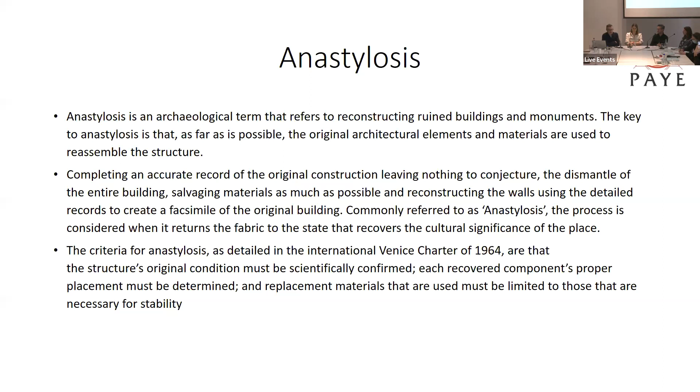And part of this next 15 minutes, we're going to see how that whole process has evolved, from rudimentary drawings in the 1960s through to using modern technology today.

The first great project after the development of the Venice Charter was the repositioning of the monuments that sat within the floodplains of the Aswan High Dam. In the late 1960s, it was decided to dismantle and re-erect a lot of these monuments, putting them onto higher ground.

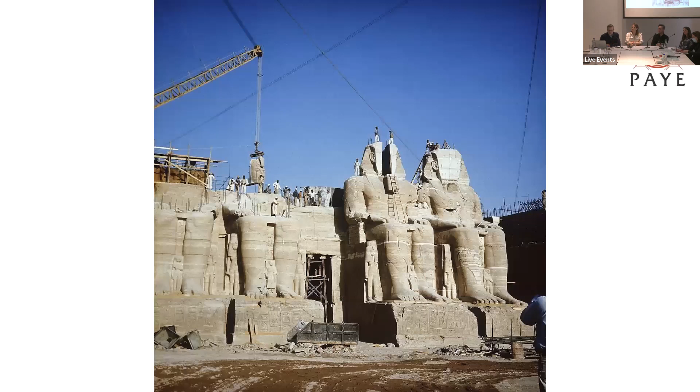And this was the quality of the information that they started with. But when you look at the scale of the buildings they were dealing with, you could see the challenge they were posed with. It was interesting to see Simon actually make reference to this in this morning's lecture, with the Temple of Philae, which was one of the buildings that was moved.

Moving on 30 years, this is the first project I got involved in, about 1997. This is 68 King William Street, on the north side of London Bridge. It's not a listed building, but the client decided to dismantle and rebuild the top 5 floors to help support the repurposing of this building. At the same time, we stretched the height of the area highlighted in yellow by 3 meters to increase the floor height of the upper levels.

It's fair to say that back in the 1990s, the reason for dismantling and rebuilding buildings was really focused on offering it to try and achieve planning, whereas now it's offered to try and provide a sustainable material. There's been a real sea change in the reasons developers offer dismantle and rebuild, and we've certainly seen that increase over the last 5 years.

Going back to this building, when we actually surveyed it, we surveyed it from the scaffold and dismantled it the next day. It was a very frenetic process - draw and go. There was no real time to assess what we were doing or understand the impact of what we discovered. We just had to capture it and take it off the job.

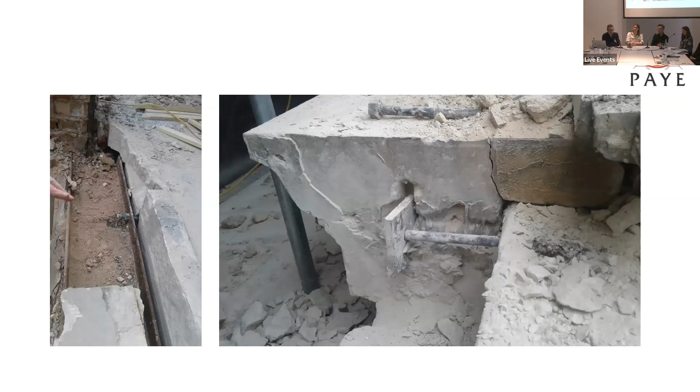But what we had to contend with was the problems of the original construction, which we only discovered as we started to dismantle. We found embedded steelwork which had fractured stones, and on the image on the right you can see the fracture through the top of the cornice block, which questioned how we were going to use that in the rebuild.

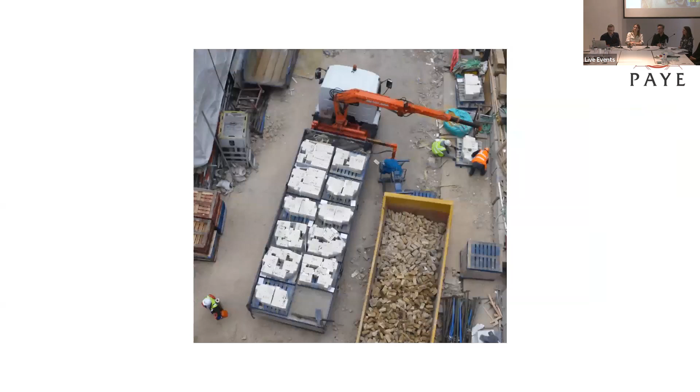All of the stones were catalogued, palletized, and taken down to ground with spider cranes, then placed onto vehicles and taken away. The stock bricks were salvaged and placed in a skip, then taken away separately, palletized and cleaned up off-site where there was more space.

When we dismantle buildings, our normal attrition rate is maybe 2% of the stones we remove. On that project there were about 3,000 stones, and the ones we did break or damage were either damaged originally, or it was something we felt best to damage so we could salvage a stone of more architectural or financial significance. So there were the odd sacrificial stones, but overall we rarely damage any stones on a project.

Then everything goes to our warehouse where it gets stored. Storage is a real challenge on projects - it's a very high cost, depending how long it is between dismantle and rebuild, and this has proven to be quite a problem throughout the project. Some clients get smitten by the idea of someone offering a field to place all their pallets of stone for free, then we have to go along 2 years later and put all those stones onto new pallets because the originals are rotten. Therefore it costs them the same as if they'd stored it properly in the first place.

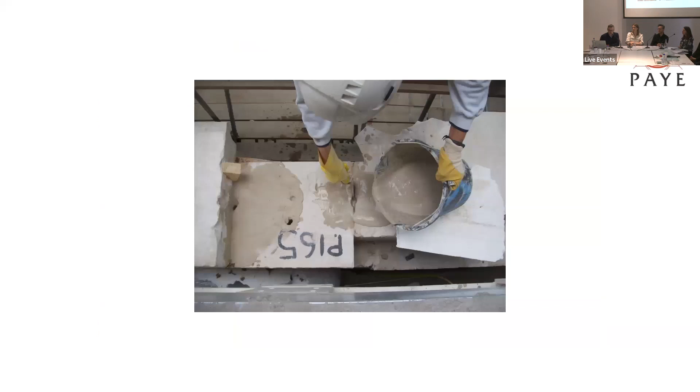With the rebuild, at that time, it was rebuilt as a monolithic masonry construction. That was the approach they had to commit to before the design had really got into earnest, because they didn't have very comprehensive details of the original construction. We could see the scale and depth of the wall and its monolithic nature. All the stones needed to be grouted, and it was a constant installation of heavy masonry, each stone weighing over a quarter of a ton.

This next project, noted this morning, is the Aston Webb screen, built in 1909 as a clever architectural intervention to hide the museum's Victorian boilers. The screen originally featured a solid stone wall facing Exhibition Road with a crested central arch, topped by a graceful colonnade that allowed passers-by a few discreet glimpses of what was behind.

In 2013, as work began on realising Amanda Levete's design for a new courtyard and entrance, we removed the Grade 1 listed Aston Webb screen to protect it and allow the work behind to go ahead. Comprising 1,375 stones, the screen was in safe storage for 3 years. Then at the end of 2016, we started reassembling this historic structure, incorporating changes to make the screen more engaging to the public.

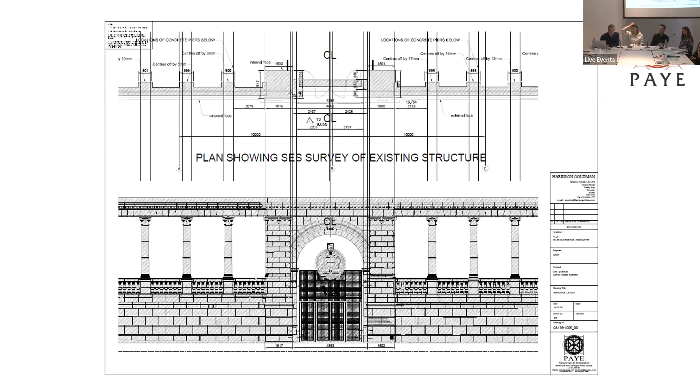So here we have a simple record drawing of the screen before we dismantled it, and then the proposed reconstruction with the post-tension columns, which are double-story columns.

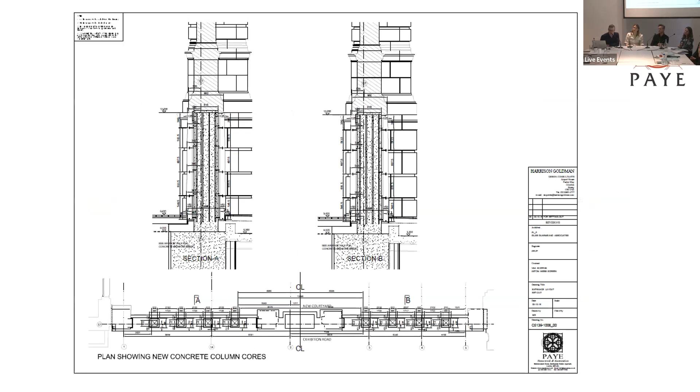Dismantling each of the stones was extremely difficult. This was down to the quality of the grout used in the joggle joints, which comprised very hard flint and a very strong cement mortar mix. The masons used a traditional plug and feather technique, normally used in the quarry to split blocks of stone in half. They drilled holes into the joints, put the plugs and feathers in, and tried to drive the stones apart. The problem was, because the grouts were stronger than the stones, sometimes it caused damage to the stones.

Therefore, we had to think of a different way, and we used a ring saw, which allowed us to get a cut depth of about 200 millimeters. So we cut every joint first down to a depth of 200 millimeters, and once we'd completed that, we then used the plug and feathers.

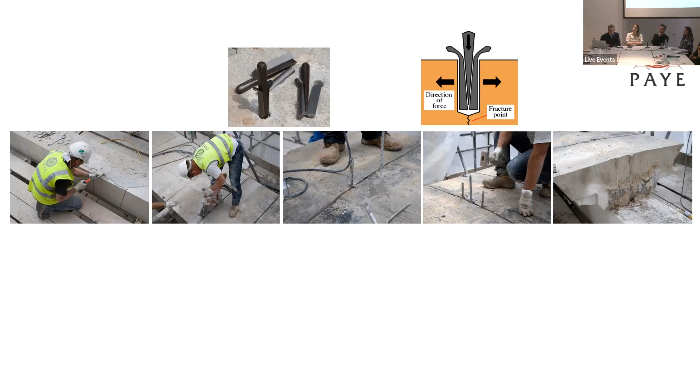Once we'd split the stones apart, we used another traditional method of masonry called a Lewis pin, which is designed to open once you apply load to it. So we drilled the hole, installed the pin, then lifted the stone enough so we could put a conventional strap underneath, allowing us to lift it more safely after that.

The stones were weighing over 1.5 tons on the grand cornice, and these were being moved around by skilled masons, but also with specialist lifting equipment.

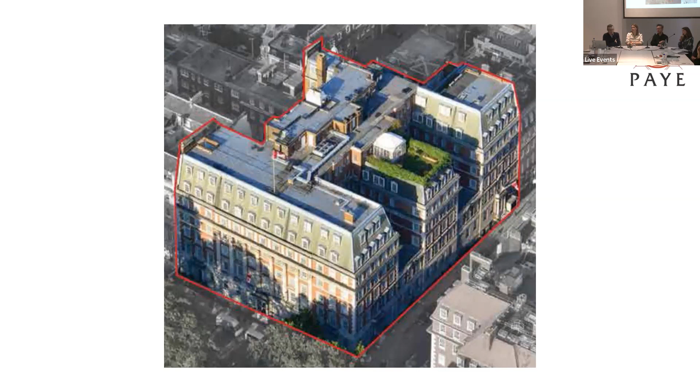1-3 Grosvenor Square was the former Canadian Embassy in central London, and it was sold off as a private development. We were tasked with dismantling the building, placing it into storage, and then reconstructing the facade as a new face to the new structure behind.

The client had two main requirements for us. One was to increase the height of the building by 2 meters, and the second was to provide no visible movement joints. So we had to consider how we were going to achieve this task.

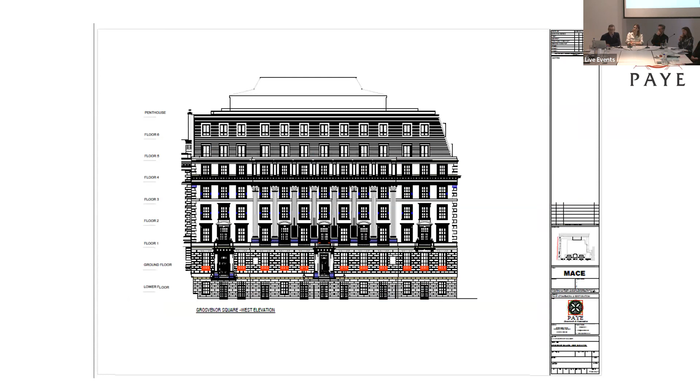Stretching the height was relatively easy because we found there were certain architectural details where we could add additional courses to push the height of the building. The blue area is actually a new elevation that we installed.

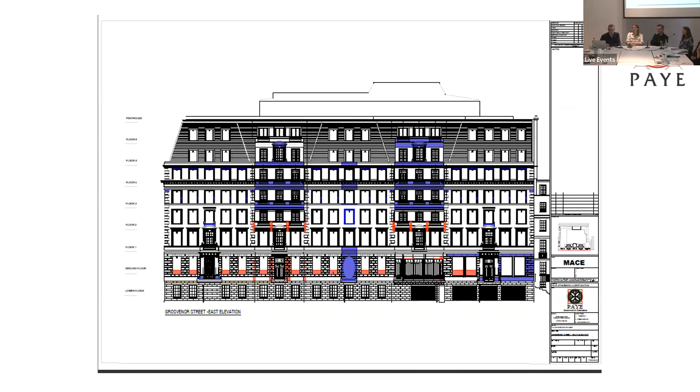With the movement joints, we looked at the use of hydraulic lime mortars and how we could use those to extend the distance between movement joints beyond the perceived code. We provided them with a facade which has discrete joints, hidden behind the way we connected two elements of the facade together.

Again, we had the usual task of trying to survey the building, catalogue it, and dismantle it in a very short time. Every stone is provided with a unique reference number. Here we have window head S107, which we thought was just one stone, but when we got up there, we found it was two stones. These are the things we constantly had to deal with on a day-by-day basis.

Again, every stone is catalogued and placed on a pallet, and that pallet was placed on a hard standing in East London.

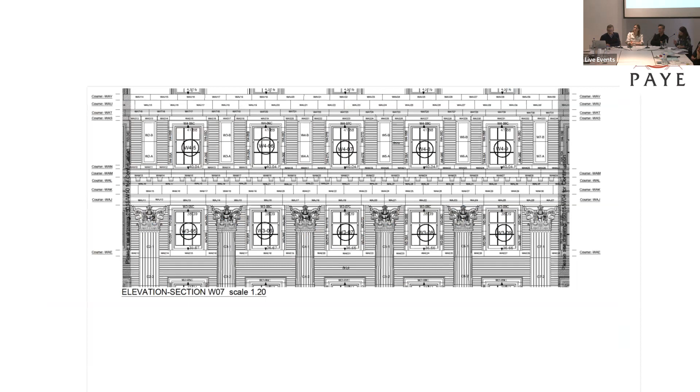Record drawings were created, and as part of this process, before we started, we also used GPR, ground penetrating radar, which allowed us to assess the depth of each stone. We've got a way of recognizing the difference in the flutter of the GPR scanner, so we know where the density changes from a solid material like stone to a less dense material like brickwork behind.

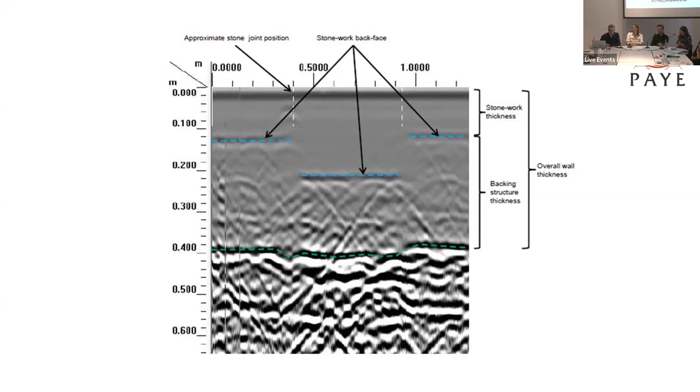We then looked at some of the lovely old 1920s construction books we have in our library, and found details similar to what we thought was being used at the time.

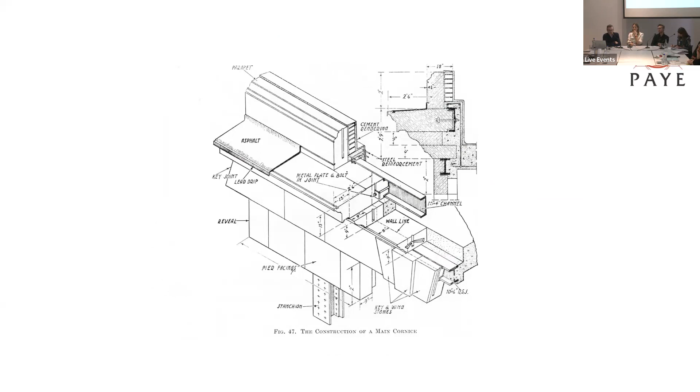Just quickly on the bricks, one of the problems we find on this project and most projects is it's very hard to demonstrate the suitability of a brick in a new use. We can't test it because things like frost-resistant testing, we'd have to test virtually all the bricks to satisfy that they're actually fit for purpose. So we had to go through a process of selecting particular bricks based on certain criteria.

We found enough bricks from the dismantling process to reface the Grosvenor Square elevation, and then we found a new brick that was a very close match that allowed us to clad the rest of the building. With the facade itself, it was a complex challenge because we had a facade of brickwork and stonework, which we weren't allowed to have any movement joints in.

And then we had a concrete frame behind with post-tension slabs. So the concrete frame through elastic creep is going to shrink by about 1 millimeter per meter over 50 years, and you've got the deflection of the post-tension floor slabs. Then attaching to that, you're applying a monolithic facade.

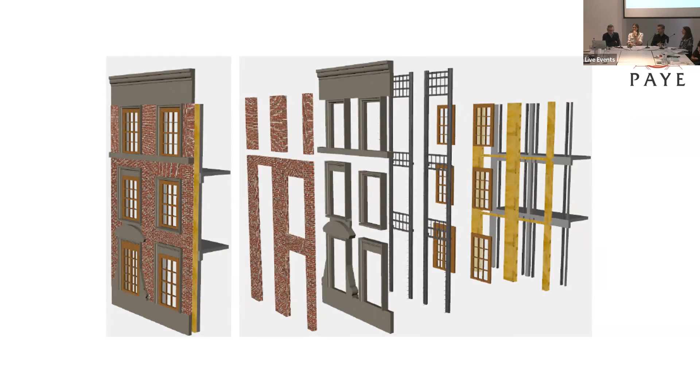So we installed a stainless steel frame within the cavity wall construction that was able to articulate the different movement criteria of the two structures.

Here we see the red box with the black core. That is a stainless steel box section that was attached to the concrete frame with sliding joints, as you can see in the top right of the image. So that provided us with the ability to control the movement of both of the structures.

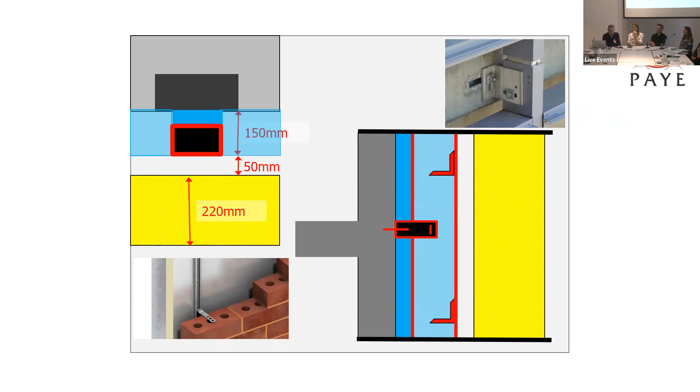Now this moves us on to 2022, which is where we are now. This is a building that we've been looking at for the last 4 months. It's in central London, a 7-story building, built about 1915, and it's got a few inherent defects that need to be addressed.

So we've been tasked with the challenge of dismantling the facades, reducing the thickness of the facades, and then rebuilding the building attached to a new concrete frame that will be constructed behind. This is where we've started to see a real benefit in the use of modern technology.

The first thing we've done is completed a point cloud survey of the building. A point cloud, I suppose, has come out of the whole BIM process. This has evolved as a 3D virtual model development to facilitate successful on-site execution of new build projects, and BIM has really been at the forefront of that.

The challenge we have is that we're working on a building where we really need to know how the building was built before we start the project. And 3D laser scanning has helped us to do that.

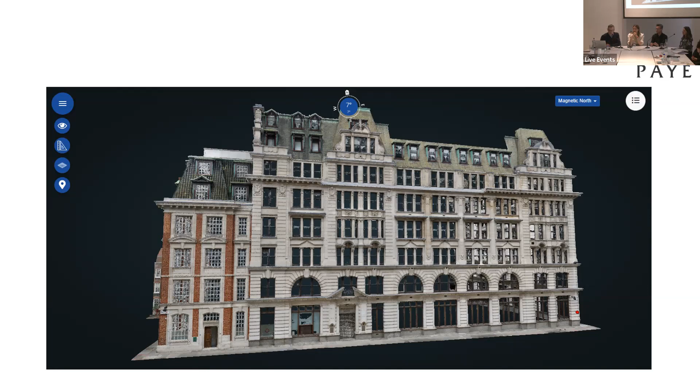With the security requirements for the building, internal access was not possible. So all of our survey works were completed externally using drones over a 2-month period.

At the moment, we have completed the models of the external facade. The model itself, and as we can see here, this is a close-up of the point cloud survey, and we can just see the little dots that form the register points for the facade.

With regards to tolerance, the point cloud survey is normally about plus or minus 2 millimeters. When we're trying to work out which dots are actually the edge of the stone and which are just part of the face of the stone, we've got a tolerance about plus or minus 4 millimeters. So overall, we're creating a solid, strong record of the facade to within 6 millimeters of its correct size.

And if you go back to what we were looking at 25 years ago, when we were just sort of drawing it as we got to it, it's been a real sea change for us in how we approach the dismantling of buildings.

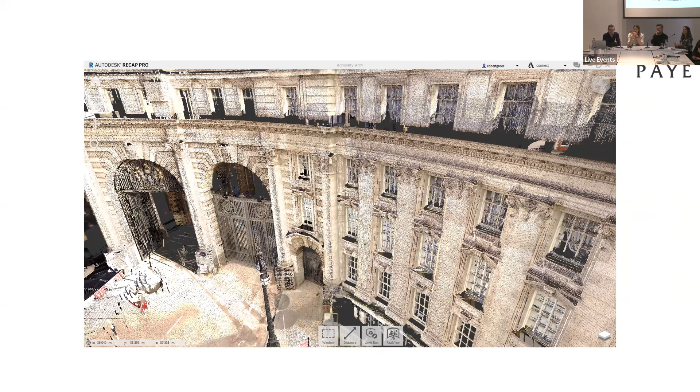This is a scan from a couple of years ago before drones were available to us. You can see there are a few black shadows above the sills and above the cornices in the projecting areas, because the conventional laser scanner sat on a tripod at pavement level is unable to see those areas.

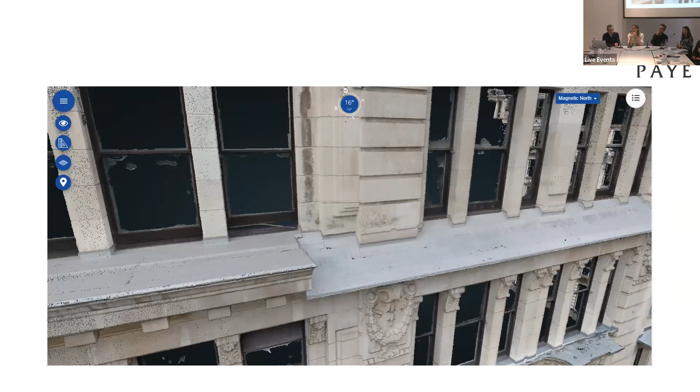With the advent of drone 4K imagery, we're able to get a fantastic record of the building. What we've been able to do is combine that with a laser scanner attached to the drone, so we're now getting a full 3D model of the building before we start.

The drone survey provides us with a visual record in a series of vertical drops that allows us to assess the condition of the masonry. This also goes to the architect to advise them of what parts of the design actually worked and didn't work with the original construction, so we can help influence how they look at the remodeling and what they may need to change.

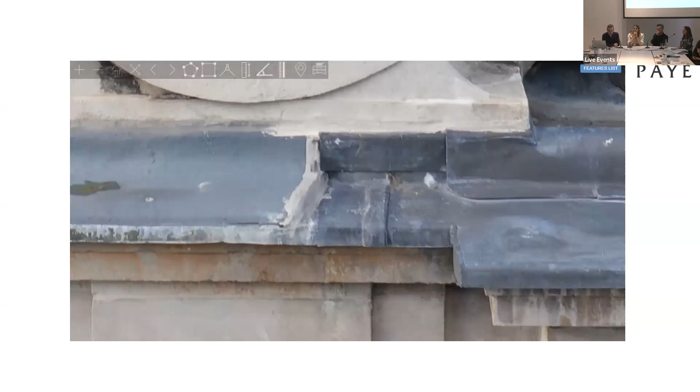A classic problem with buildings of this nature is how they address waterproofing to the sky surface of the projecting details, so we're looking at ways of reversing the fall to these cornices. Here we can see a rather crude repair to an original detail, which is very poor.

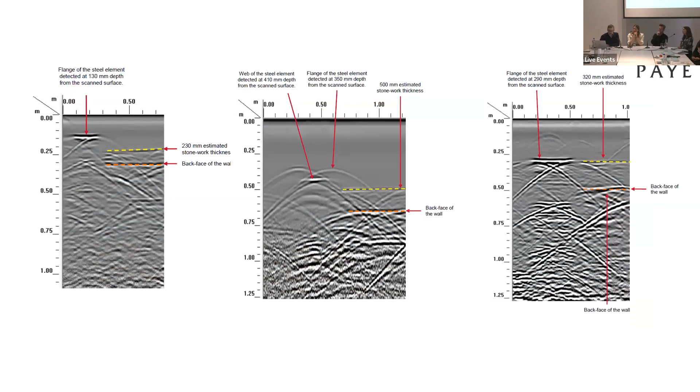As with the previous project, we completed a GPR scanning survey of the facade, so we understand what the depth is of every single stone on the building, and we've mapped that onto the elevation drawing. So we know exactly where the face is, where the back face is, and we can start to look at how we reduce the thickness of the wall to create the optimum thickness of masonry to allow them to put an inner wall line in, which is on one consistent line.

We can start to build up a more detailed understanding of what they can do for the repurposing of the stonework. And this is at stage 2 or stage 3 in the project, and not at stage 5, where we used to be starting to have these discovery discussions.

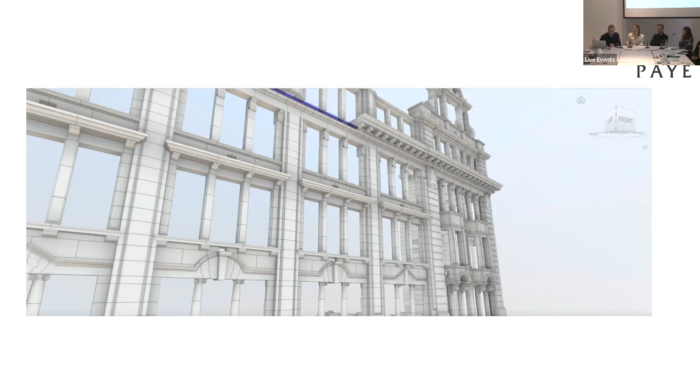With our models, this is an exploded version of the previous screen. Every one of our stones is drawn individually - there are 5,500 individual stones drawn on this building. So we can understand what the impact will be of any movement, of any change in any part of the structure or detail that the client requires.

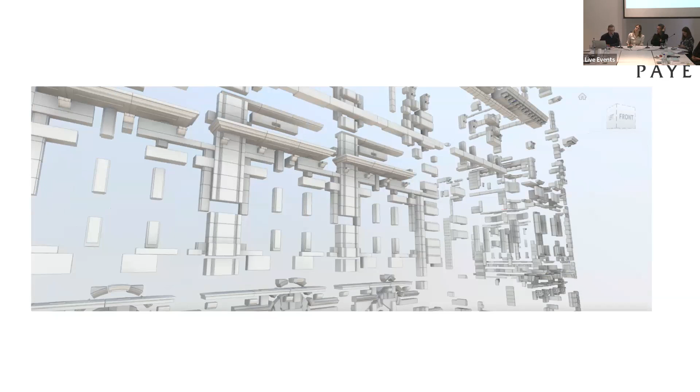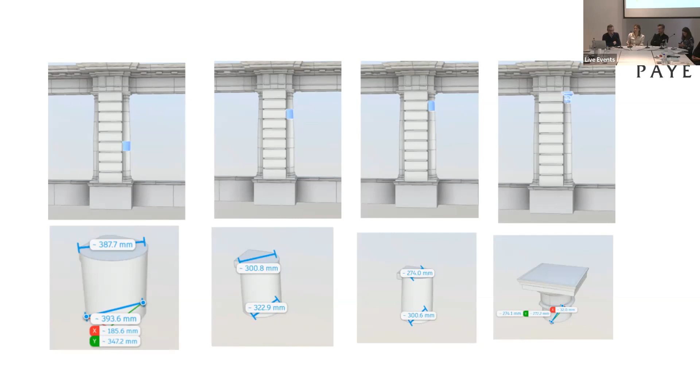Here's a couple of screen grabs of the ground floor. What we were trying to understand was what would happen if we tried to stretch the ground floor by a course, and how that would impact upon the entasis of the circular columns which are against the windows. It was proven that there was not an opportunity to do anything with this because it would have been such an adverse effect on the masonry, so they moved on to look at another solution to the challenge they had.

Whilst this exploded view shows the kit of parts that we're going to be carefully dismantling, we could have just drawn this as a flat plane, just as a simple flat element of stonework, but we recognized the benefit of modeling and capturing every single piece of stone as its own individual model.

And we've started to look at the next phase of the process, which is the dismantling, and how we can improve the process of dismantling. What we found is that the usual error is the human error of recording the information of each stone as we remove it off the project.

On that website, we're able to catalog the original size of the stone, the palette reference for the stone, and what we need to do to that stone to allow us to incorporate it into the new works. It also lets us understand our productivity in real time, because as soon as you scan it, it goes straight to the cloud, so we know exactly what day it was removed, who removed it, and who installed it on site, giving us a full understanding of the quality process.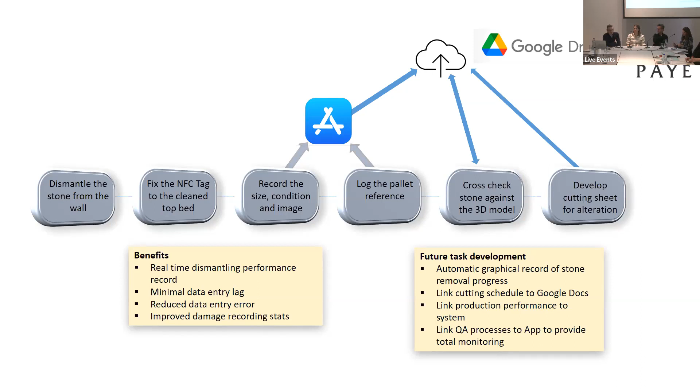Now I would like to invite Lionel to join us remotely, if he's in the room. All right, can you see my screen? Absolutely, okay perfect, all right.

I will first start with introducing Rotor very quickly for those not yet familiar with the organization. As Odeline mentioned, Rotor was started in 2005, and initially we were looking a lot at the leftovers of industrial production in general, looking at amazing or strange objects like this one, which is a color transition from a bin liner producer. It was a question of trying to find new potential uses for these materials, but also to look at the kind of culture embedded in these products.

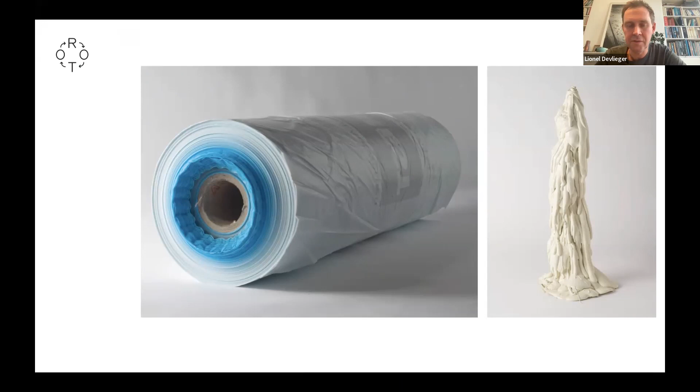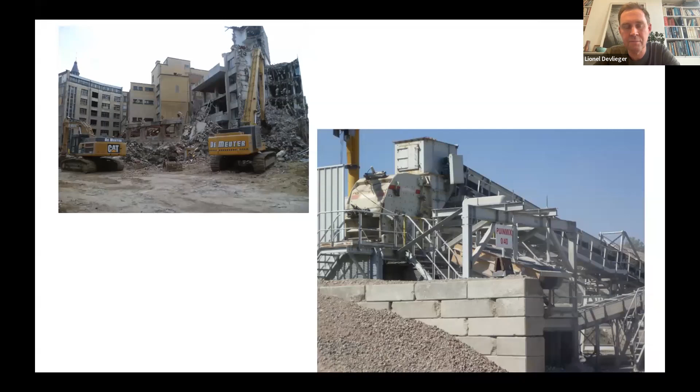But then very quickly our attention shifted within the large field of industry. We started to focus on the construction industry because we realized that the amount of resource waste there was so staggering that it seemed it would be quite simple to make a little bit of a difference. We were shocked by how widespread the practice of downcycling buildings was, crushing the inert fraction into aggregate. We were also shocked that some public authorities, like the Belgian or Flemish government, were even proud of that practice, which for us boils down to the systematic destruction of value, reducing it to something utterly meaningless and deprived of any use value.

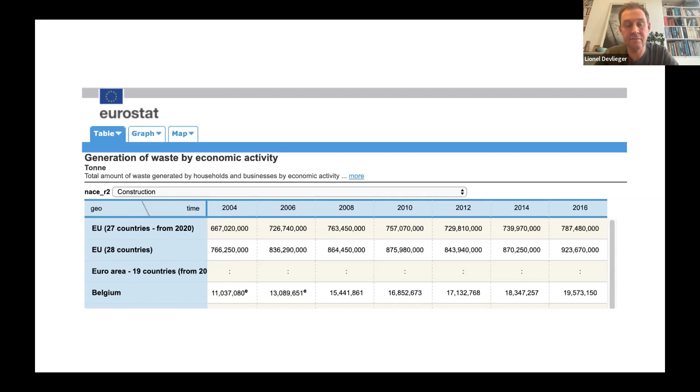Now, studying the whole sector of building and demolition waste production, we gradually looked at the numbers and were pretty amazed that the situation was not improving. On the contrary, what you're looking at here are the numbers for Belgium specifically, within the EU at large. Between 2004 and 2016, you have an increase in the amount of building and demolition waste produced that almost boils down to a doubling, going from 11 million tons to almost 20 million tons in that short time span.

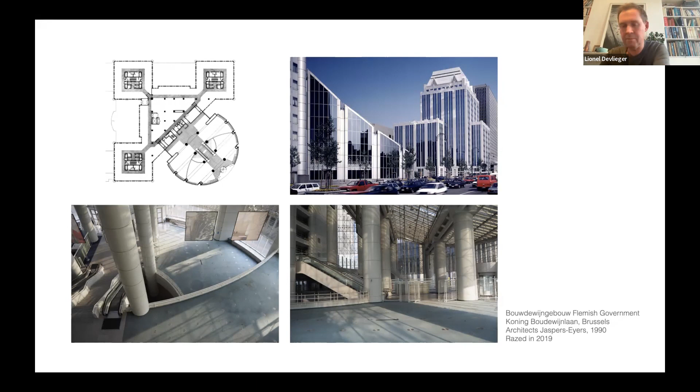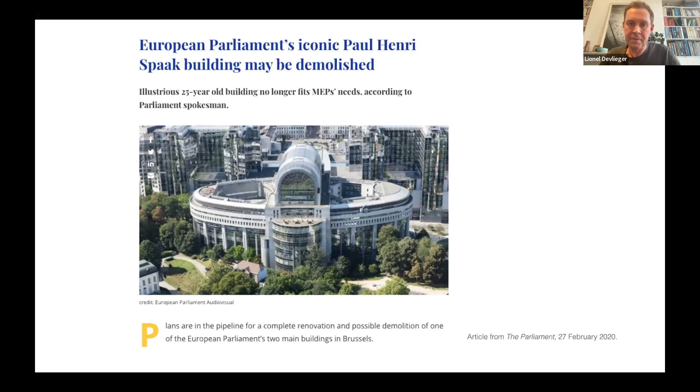It's a question we've always asked: why is this happening, why do we have that increase? There are probably many elements to an answer, but one particular culprit we'd point to is architectural obsolescence. We have buildings of large, even mega size, being demolished after increasingly short lifespans, such as this building, barely 30 years old when it was razed in 2019, a building from the Flemish government, or this one, the European Parliament building in Brussels, whose fate hasn't been decided yet, but which is also a little more than 25 years old and might be razed completely as well. It's another topic, but it shows we're dealing with important cultural question marks.

Now Rotor today, this is the way we present ourselves, is like a table with four legs. Part of the organization deals with interior design projects, and there's a lot of work around design assistance, I'll come back to it. There's a cultural dissemination part of the work of Rotor, producing exhibitions, conferences, and teaching. There's research, and then there's a fifth leg added already 5 to 6 years ago, which is Rotor DC, now a spin-off company active in the dismantling, refurbishing, and resale of building elements.

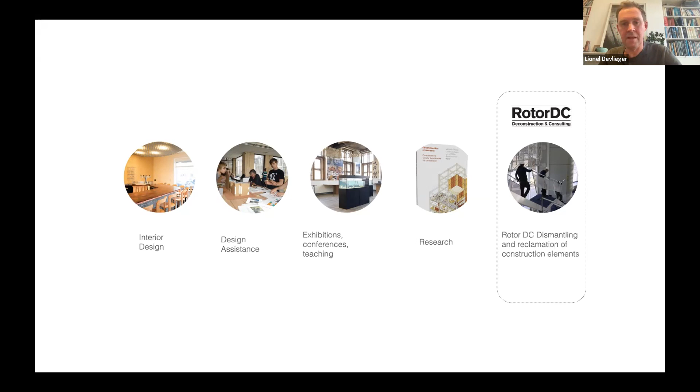Today, formally, you have on the one side Rotor, which is a non-profit organization still, ever since it was founded. And then you have Rotor DC, the spin-off, which is a more commercial company, but it is organized as a cooperative company.

Now, what has Rotor been doing? I already gave you that overview, so I won't go over it all. That's not the purpose of this talk, but an important portion of what we do is providing advice to public authorities on how to tackle the whole issue of building and demolition waste, and to push these authorities in the direction of more virtuous practices. In many cases, this means pointing back at what was being done in the past, which was always better than what is being done today, such as the practice of selling buildings that need to be demolished instead of just asking a contractor to break it down.

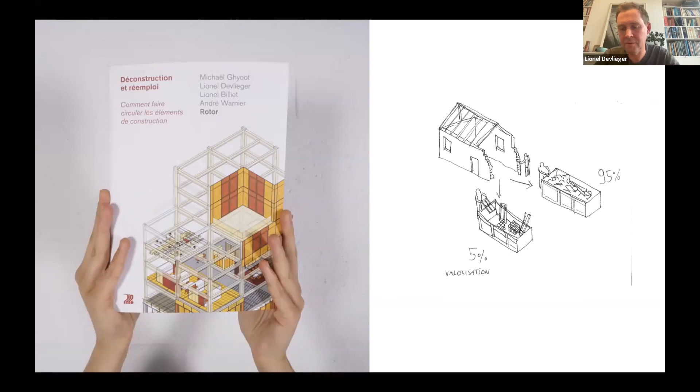We also give advice on what could be done in terms of contemporary policy through books such as this one you might be familiar with. The sketches show one of the ideas that is very simple, which would be to force anyone who's taking down a building to put 5% of the value of the volume of what is being dismantled aside for refurbishment and resale.

Now, we've also done a huge work of documenting in Belgium those companies that are already active in the refurbishment of second-hand building materials. That is the project Opalis. I will come back on it later. It's a project that started around Brussels, grew over the territory of Belgium, and now is expanding towards France, the Netherlands, and we're also looking at the UK in collaboration with our partner Salvo in the UK. Obviously, we hope to expand this project even further in Europe, but it's going to take some time.

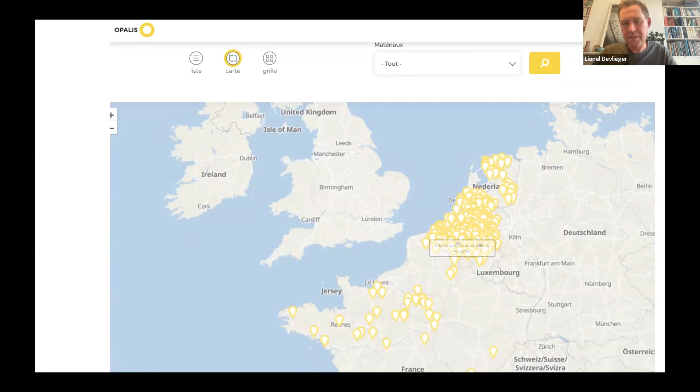The major recent expansion happened in the context of this project, which is a European Interreg project, FCRBE. If you type that in, you will find the website of the project with lots of documentation materials and also policy advice materials. So the project has entered the second phase now, but an awful amount of very useful deliverables have come to surface. So I definitely recommend you to go and see there.

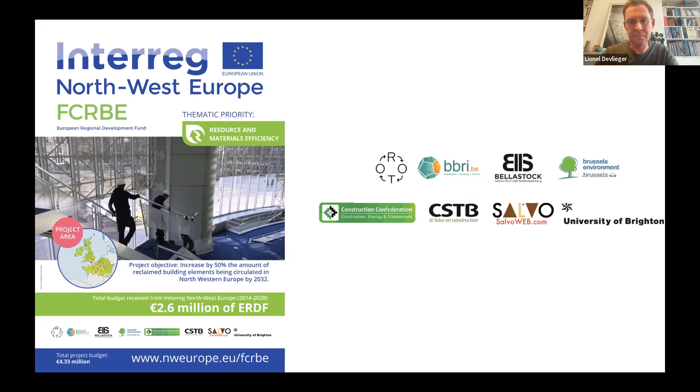On the right-hand side, you will see all the partners involved in this project. Obviously, the purpose of projects like that is to look at that gigantic network of operators which are engaged in the tantalizingly complex work of refurbishing existing building materials. It's in the continuity of the notion of urban mining, of course, even if we tend to be a bit skeptical sometimes about that notion. But in any case, most often we enthusiastically embrace it as well when it's useful.

Now, to get back to the practice on the field, this is a project that I wanted to show you because it has been like the project that kickstarted Rotor DC into existence. It was a project that started in 2014. The building you're looking at is no longer there today. This was the seat of the most important Belgian bank, which has been taken over by the French, is now the BNP Paribas Fortis Bank.

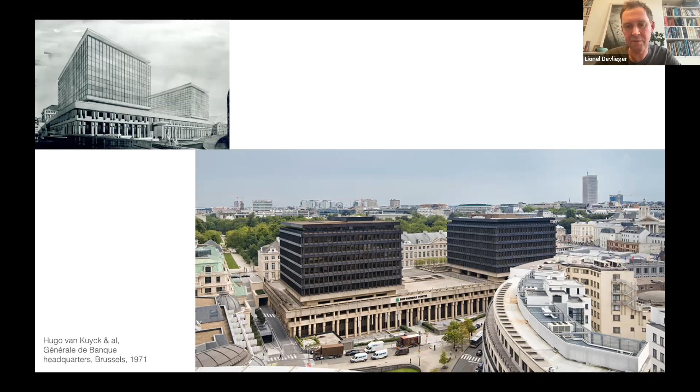This building from the late 60s, built early 70s, is a brutalist design. It wasn't really loved so much, but everybody was agreeing on the fact that the interiors of the bank building were amazingly well designed and also realized in very precious materials. I don't know if you can see it, but have a look at the octagon flooring in this building, which is made out of the same granite that is also used for the walls here.

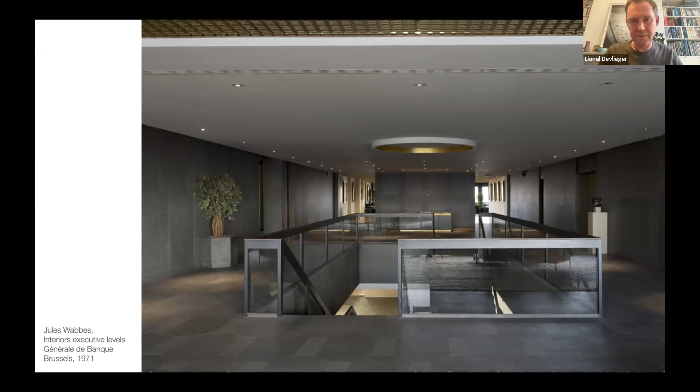You will see it later on in this presentation. So we went to that building on invitation of Docomomo Belgium, and we were invited to extract as much as possible. The first motivation was a heritage motivation because of the value of these interiors, but obviously for us the environmental dimension also played a role.

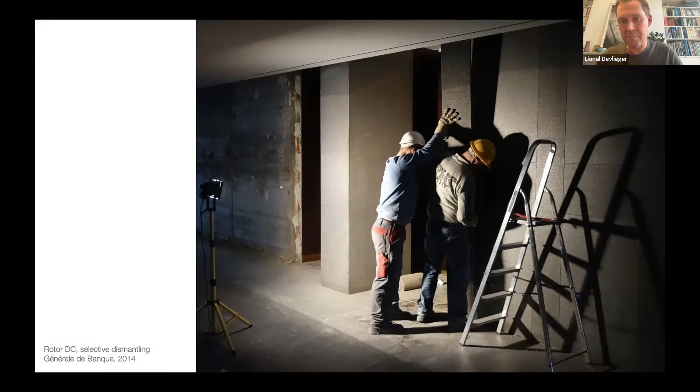So here you see how, as part of the extraction process, we took out these wall elements in granite. These were cleaned on the spot, on site, palletized, and then brought to our warehouses.

One of the other elements that we extracted from there were these ceiling elements of the ground floor of the building, which was the public part of the building. It's, let's say, a design that has been used by other famed architects, but very much loved by Jules Wabbes, the designer of these interiors.

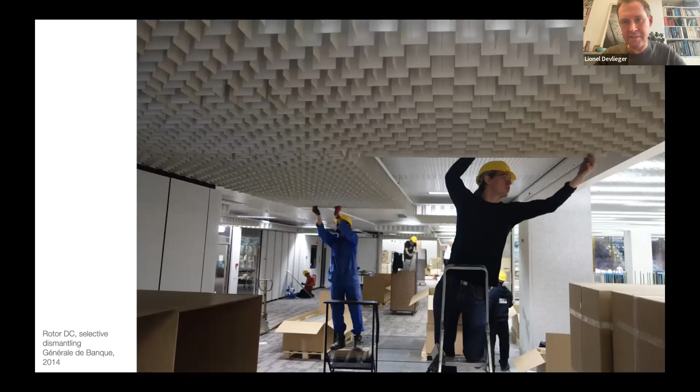The ceiling is filtering the neon light that is coming from the top, but also hiding all the techniques away, like the sprinklers, etc. We developed a technique to dismantle them, and obviously the system is flat pack prone. So we were able to dismantle hundreds and hundreds of square meters of this ceiling.

Afterwards, the product was put on the website of Rotor DC and sold to a variety of partners. There must be like 20, 30 different locations in which you can spot this particular ceiling element.

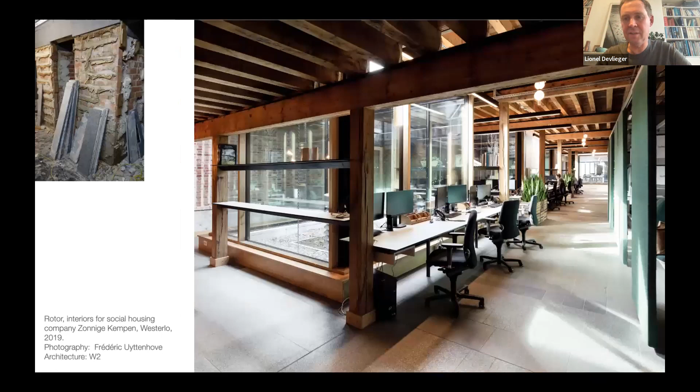But I wanted to take you to the backside of this renovation project, where you have the office spaces. And if you have a look at the flooring of this backside, you will see that these are the granite panels that I showed you before. So initially this was wall cladding, but here it was transformed into flooring.

I haven't mentioned yet that the granite that Jules Wabbes chose was finished as a flamed granite. It means that it has been heated with a plasma flame, so that you have this rugged surface that appears, which is very pleasant to the touch, but also very good as an anti-slippery system.

The granite was also coming from two different quarries in Italy. So you have these two varieties of gray, which is also very pleasant to look at.

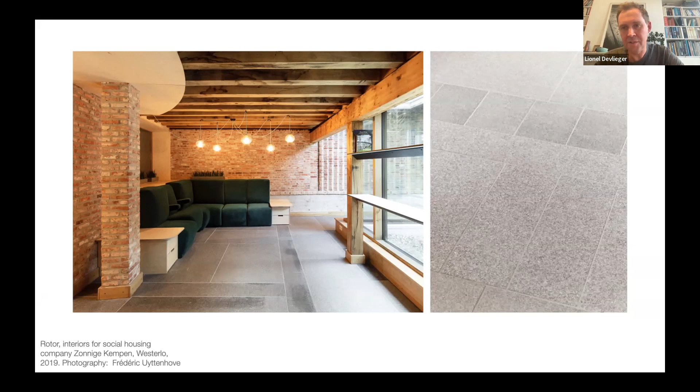But what is probably worth mentioning here is that we had a whole lot of different dimensions for the plates that had been used to clad the walls. And we had to go through a painstaking operation of putting these together according to the different thicknesses of the slabs, because we realized there were different thicknesses.

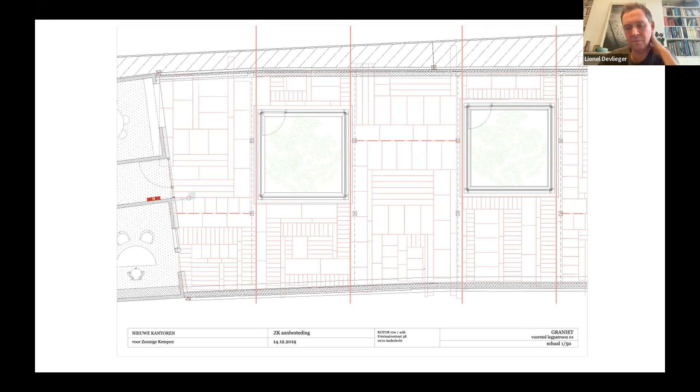So we created these zones in function of the thicknesses, designed a pattern for each of these zones, and then the very skilled artisan who put the floor in place could just work with uniform thicknesses, which made the work far more easy than it had been otherwise, even if it was still complicated.

So another project that I'd like to show is one in which Valérie Vermandel, who will act as a respondent to this session, she knows it far better than I do, as she was the commissioner for this project for the company Whitewood, who bought over this structure.

On the ground floor, it was a shop for Philips electric goods, but the upper part of the building was obviously all offices for Philips employees.

Now, Whitewood is really developing this into modern office space. What it did was try and maintain as much as possible of the initial building in the heavy refurbishment that they conducted to make the building up to date.

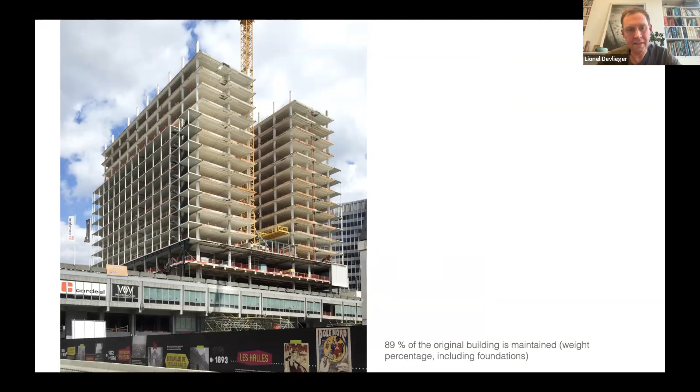Rotor assisted Whitewood in trying to, on the one hand, give a new purpose to all the materials that were extracted from the building and that couldn't reintegrate the renovation project, and on the other hand, identify second-hand building materials that could re-enter the renovated project as well.

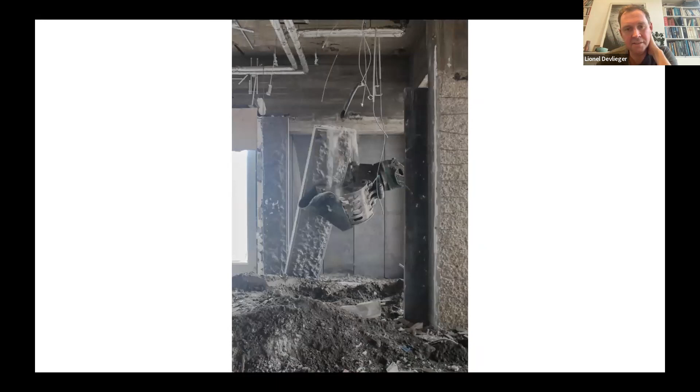What you see here is the extraction of some of the gigantic rusticated solid stone elements that were decorating the base of the structure. This is old Belgian blue limestone. The rusticated surface was very skillfully done in the late 1960s, and it would have been a pity to lose that.

So for those slabs that needed to go, but for which there might have been new applications, they were carefully dismantled, stored, and then taken away to our warehouses.

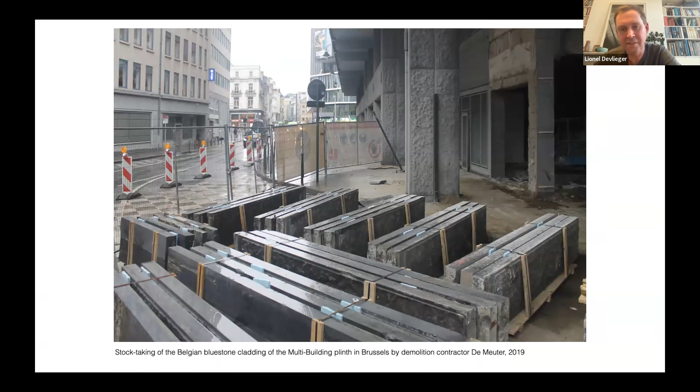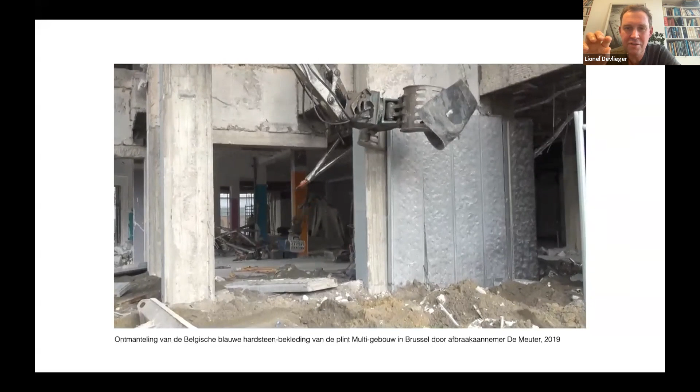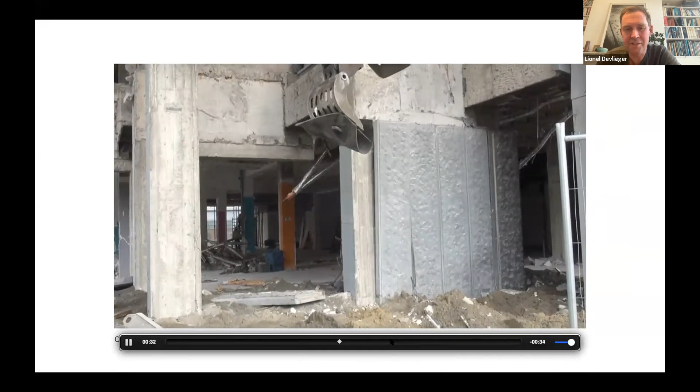What you see here is the way in which this crane operator is doing the dismantling, and you see how the crane has been protected with these rubber gloves, so as not to damage the stones. You will also see that the procedure is letting the stones fall on a bed of sand, so as to avoid them breaking or getting damaged. I will increase the speed a little bit.

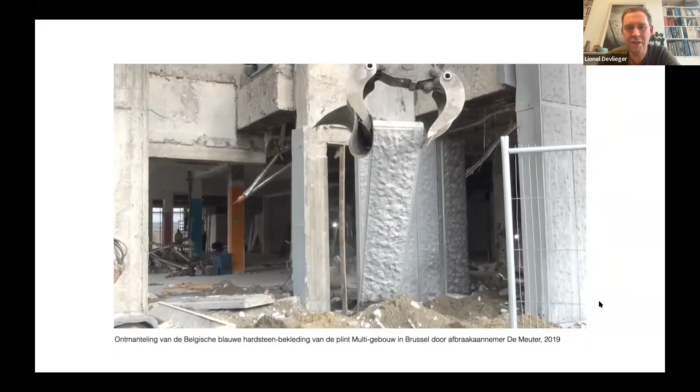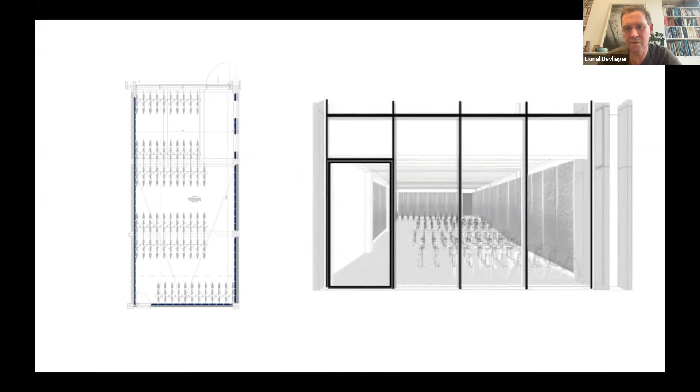There was another challenge. I talked about the reintegration of elements that were not quarried or urban mined on the site, but that the commissioner wanted to integrate into the project.

That was, let's say, the surface of the ground floor. We've been looking at potentially fitting materials for that ground floor, and we ended up at a reseller of secondhand natural stone, called Maris, close to Brussels.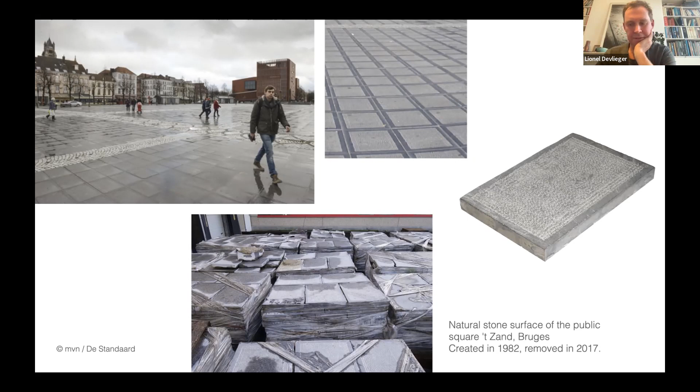They had dismantled this gigantic square in Bruges, made out of bush-hammered, also Belgian limestone, that had been dismantled in 2017. Eventually, in collaboration with the architects, a design was found that was mimicking the original pattern, as you see on the top right of this image.

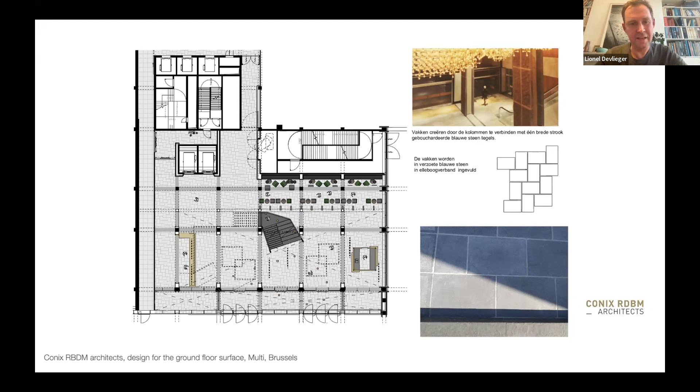Then you had the flat surfaces used in between the bush-hammered lines. You will understand it better when you see it. Here at the bottom you see the bush-hammered lines, and then the freshly cut surfaces that are forming the surfaces in between.

The same view here, with the detail on one stone that has not been mortared, giving access to technical equipment under the floor.

And for the same project, that famous octagonal bichrome granite from the bank building was also used. So you have to imagine that this floor, we dismantled it somewhere in 2014, and now eventually it has found an application in central Brussels, something like 8 years later, but we're super happy that it comes into being.

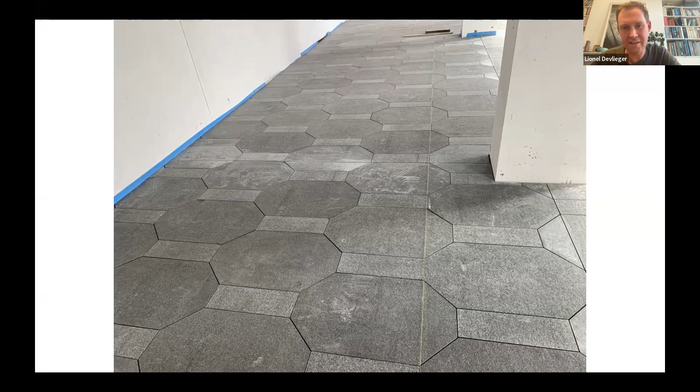These are the first images I see of it, and I'm thrilled. I will go quickly through this.

This is another, very different example of extraction as well. It's a magnificent, beautiful building that unfortunately will be razed. It's a scandal that it will happen, but we extracted from it only the window sills, which are made out of two types of marble.

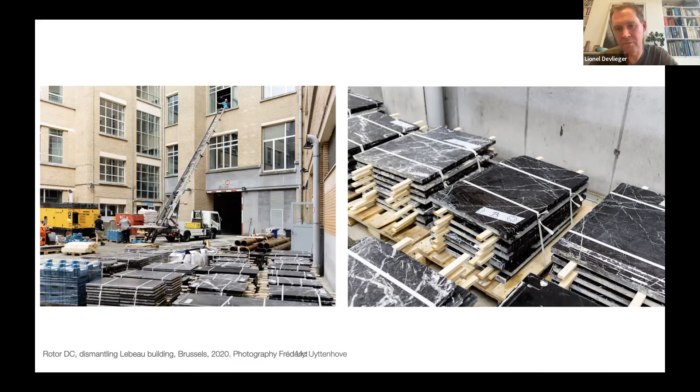This is, let's say, North French stone called Grand Antique du Nord, and the other version, which you see here, is the Bleu Belge. These are both, let's say, Belgian marbles that are now completely exhausted, so you will not find them anymore. We were talking about stone as being an inexhaustible material.

You have to know that Belgium is famed for its pitch black marbles. This is a version that is not completely black, so they call it blue in French, or in stone quarry jargon. The funny thing is that marble, when it was almost formed, was transformed by some motions probably millions of years ago, motions in the layers. Then you had that calcite pouring in, forming these beautiful veins. So it is a totally unique marble, very typically Belgian, used a lot in Art Deco times, and now completely disappeared.

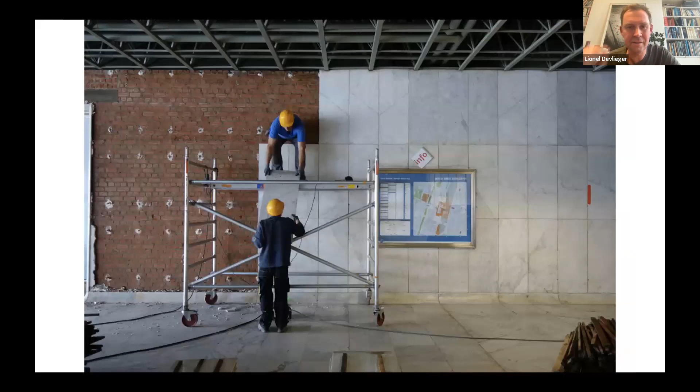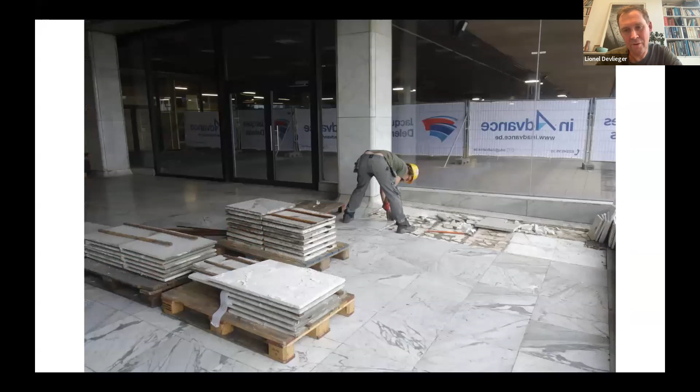Another example of a very beautiful Carrara marble that we dismantled in the Brussels railway station, the North railway station. It's a marble from a project from the 1970s. Look at the nice detail of that rounded connection between the floor and the walls. When we submitted this marble to a good friend geologist, who is like the Belgian authority on stone identification, he said this is obviously a Carrara marble, one specific variety called Calacatta or Arabescato, and it's of an amazing quality.

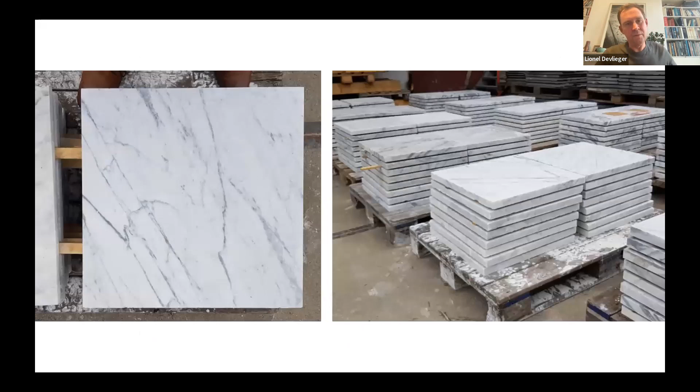So he was completely thrilled when we showed these images of the dismantling. It's a marble that we had such gigantic quantities of available that it took us a while to sell it all, but it has all gone. People love this. We bought a machine that allowed us to grind the edges of these marble slabs once you dismantle them, and that's something we now routinely do when we dismantle marbles like these. We try to get a perfect quality for the edges, so that you can put it with almost invisible mortar joints. Then we recommend repolishing the surface, and you get something indistinguishable from a new marble floor.

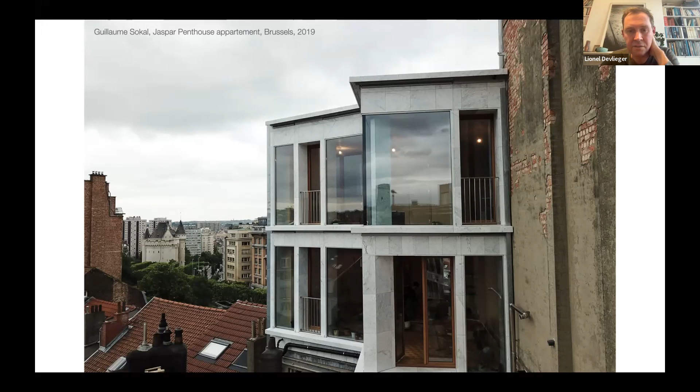One of the nicest applications of that marble was in a facade, a very surprising project of which I don't have very good pictures, but at least this gives you an idea. It's a recent project by an architect called Guillaume Sokal. It's his own house or apartment, a penthouse apartment on the Boulevard Jaspar in Brussels. Here, two detailed views. These images are actually screenshots from a very nice movie that was made about it, which you will find without any trouble on the internet if you look for it.

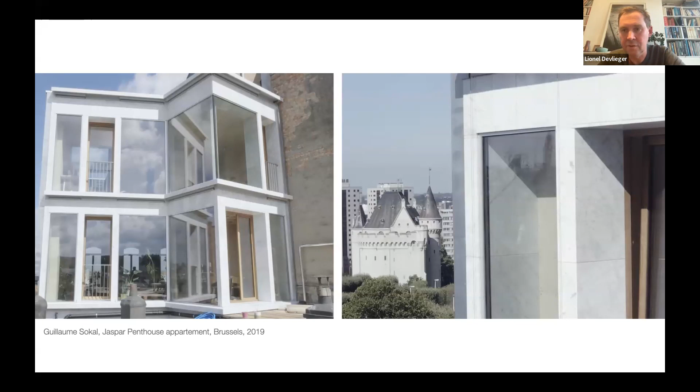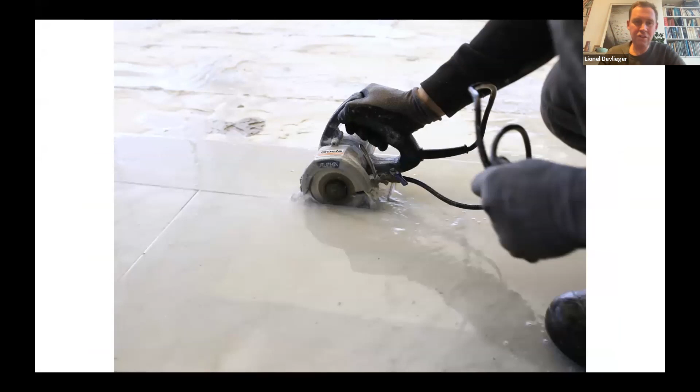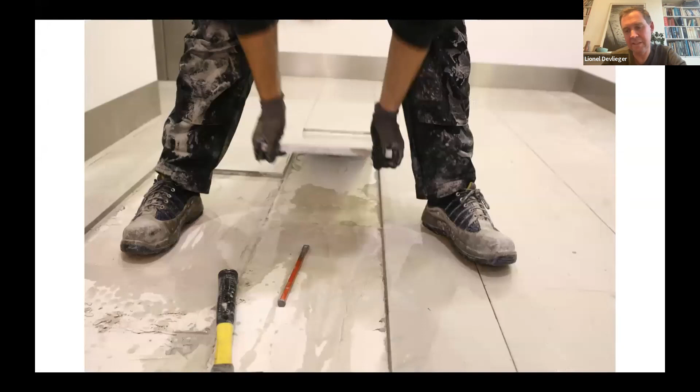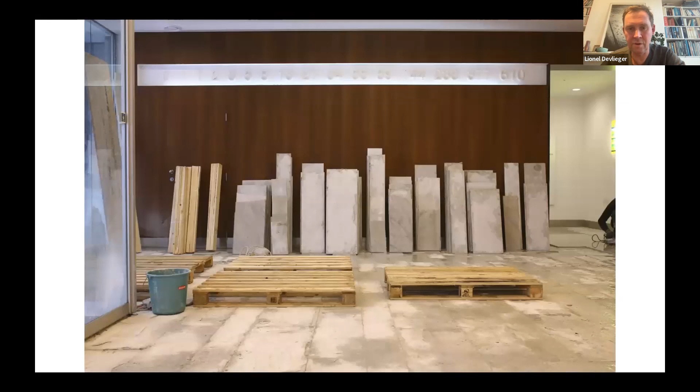So the cement obviously doesn't come loose as easy as it should be. Eventually we had to cut through all these cement joints, a little bit like they had to do in the former presentation, to be able to take the slabs away one after another. The advantage was that you had that continuous nature of these joints, and we were able to salvage all of these slabs, bring them to our site and resell them. But it gives you an idea of how tricky it can be, and how much salvageability is dependent upon the specifics of the joinery. That's it.